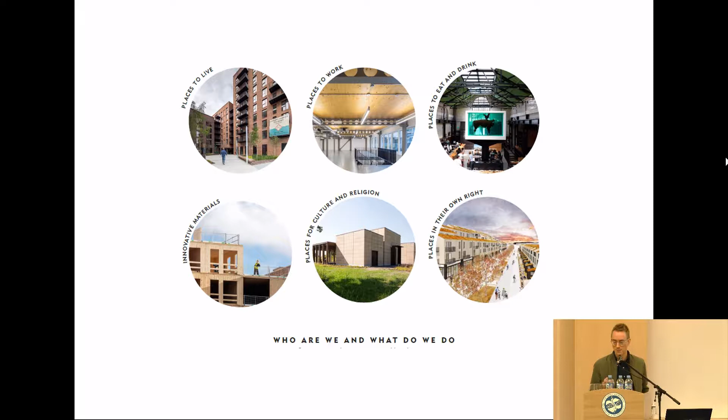We're a studio of about 30 people, founded by directors Andrew Waugh and Anthony Thistleton about 21 years ago, based in central London, but we work across Europe, including projects in France, Sweden, and predominantly the UK. We work across lots of different sectors, so predominantly the residential sector, apartments, private houses, and increasingly a lot of commercial office projects, particularly in London at the moment. We also do other things like Jewish cemeteries, which is a bit different, and we also do master planning projects and things like that, so all sorts of different scale projects. And that kind of gives you an example.

We've done CLT projects on private houses all the way through to student living and larger apartment schemes, so a real diverse mix of projects within our portfolio.

We've worked for lots of different clients, so Vastint, who I know are a large company across Europe, we've done quite a bit of work for. Berkeley Homes and the Office Group, two of the largest development companies for residential and commercial in the UK. So we work with lots of different people, and we really enjoy collaborating with our clients. We always think that design is a process, and that working with clients is the best way to get the projects that we want and they want.

We're also very much involved with academic research and work closely with lots of universities, so we have a good relationship, particularly with Cambridge University and Michael Ramage there, who is heading up their materials department. We do quite a bit of teaching, so my boss Andrew particularly lectures across the world at places like Yale, in Switzerland, and in Scandinavia. He's not here today, you've got me, but it's all about getting the message of CLT out there to everybody.

We're an award-winning practice, so a lot of the work we've done, although it's CLT and timber orientated, design is at the heart of everything we do. CLT to us is a design tool that we use to create our buildings, and a lot of those have been recognised with awards, which has been fantastic.

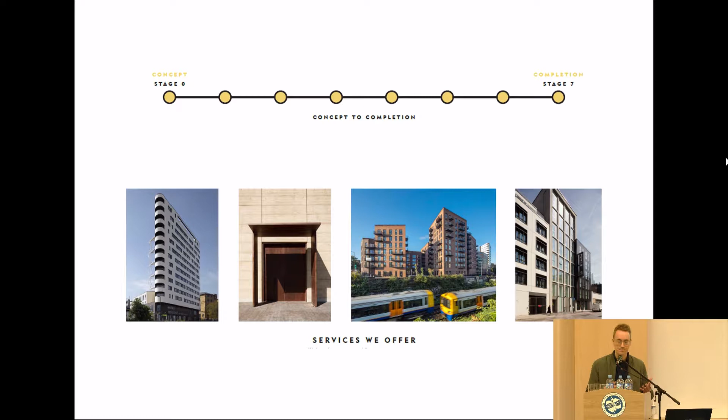As designers, we're very interested in how things are connected and how they go together, and we think the best projects come from that understanding. That's not to say that we don't just work at early stage stuff, so we can do concept design and what we call planning sorts of designs, and often we'll stay client side during procurement to ensure the building is delivered in line with its design intent.

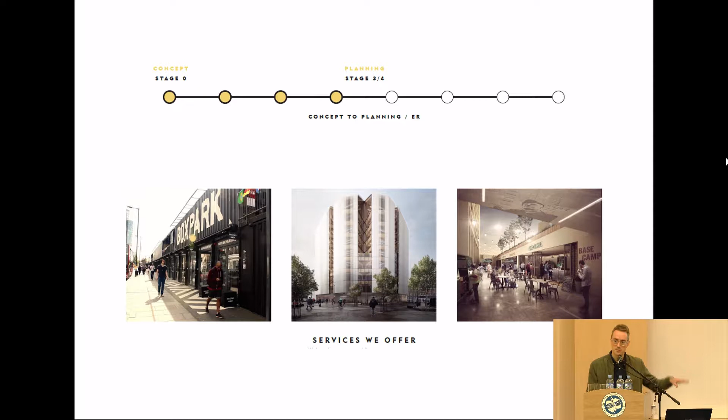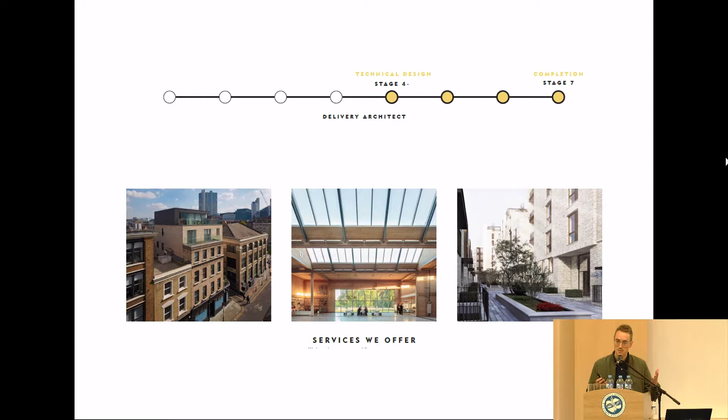So why do we use CLT as a practice? Fundamentally, for Waugh Thistleton, it's about trying to limit our impact on the planet and make a positive contribution to reducing carbon dioxide emissions. The reason we use timber as our main product within our buildings is that it promotes decarbonisation and the forestry economy. By planting more trees, we're absorbing more CO2, and if we can create a market for that activity to occur, then we can promote that reduction in carbon dioxide emissions.

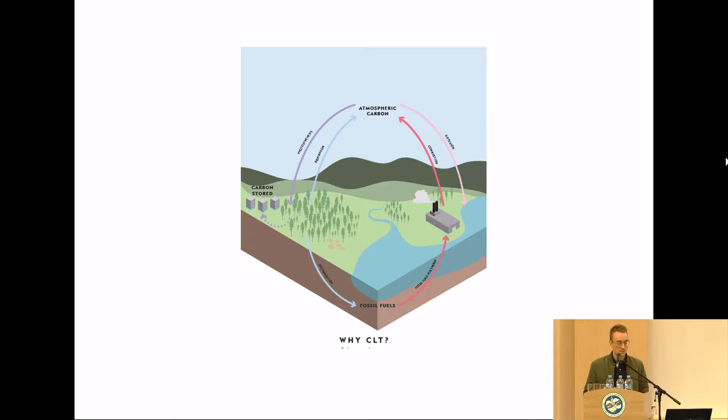Why is that important? Well, if we look at concrete and steel, they're huge contributors to our climate problem. The production of cement and concrete is very energy intensive. There's a lot of steel that goes into our concrete buildings to reinforce them, and these products take a lot of energy to make. And if you consider where the sand comes from and things like that, we are having a large impact on our planet.

So the use of timber for us is to try and move away from these traditional construction materials that were kind of the 20th century materials, and using timber, try and find an architecture for the 21st century.

Also, another good reason to use timber products is that the buildings we're creating these days are very airtight, very well performing. The building regulations and standards necessitate that the energy these buildings use once they're in operation is relatively low. And what's happening now is that because that's becoming so low, the embodied carbon of the buildings we're creating has a much greater impact on the overall carbon profile.

So we're really keen to put the discussion and the argument out there into the industry that embodied carbon is just as important, or more important, than operational carbon. There's obviously room for both, and we have to think of that in a joined up way. But at the moment, a lot of statutory legislation, lots of the measures by which we judge sustainability, is weighted to operational carbon rather than embodied carbon. And we think that should change, and we think timber can obviously help that.

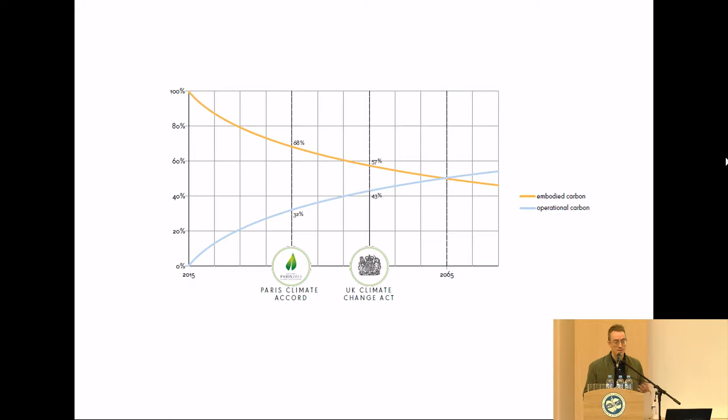And so CLT, just by its nature, is sequestering that carbon within the product, and then that carbon, once it's in a building, is locked away.

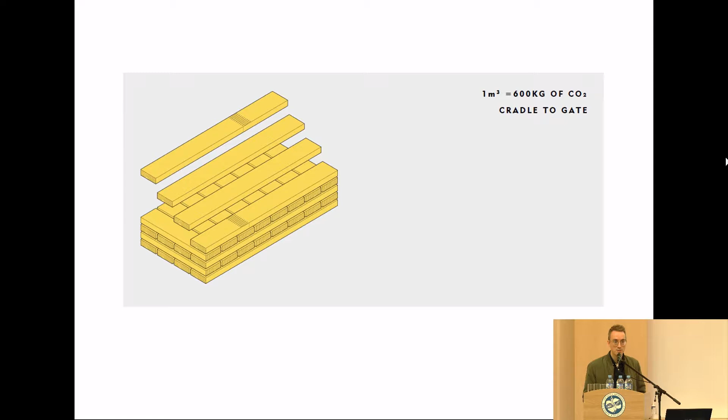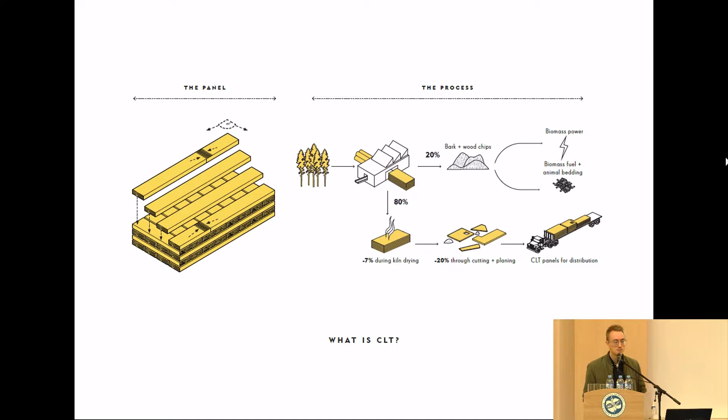It's important to understand that the process of creating engineered wood products is actually a very low waste process. Once those trees are harvested, the timber can be manufactured into various different products. With CLT, it's about small pieces of timber laid perpendicularly to each other to create strong panels. During that process, any waste from the cutting and manufacture gets put back into the manufacturing cycle. So if you've been to one of these plants in Austria, you'll see that the waste wood contributes to the energy that drives the machinery within these factories. It's a real holistic process from forestry all the way through to manufacture.

And if we consider that manufacture as one part of this circular economy, then we can lock away that carbon within the buildings we're creating. And that's the kind of process we're trying to encourage.

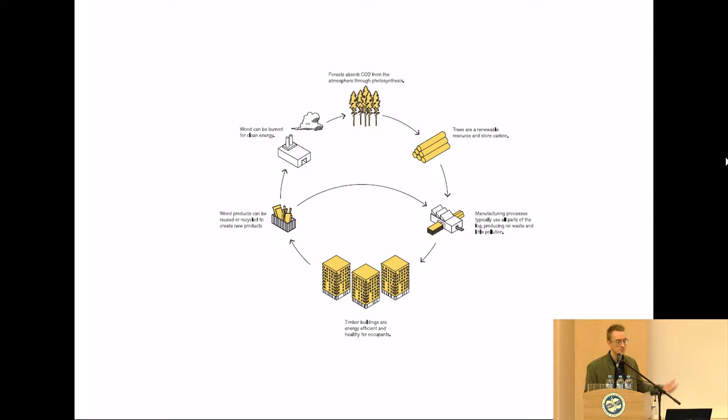And so the Murray Grove project, which we've seen briefly just a minute ago, was the first at-scale realization of our ambition to create a low-carbon building. This, for example, was a 9-story residential building. I think there were 47 apartments in there, and this was completed in 2008. This is regarded as the first timber tower, if you like, and for us, the first proof of concept that CLT can be used to create large-scale buildings that will sit within our urban environment.

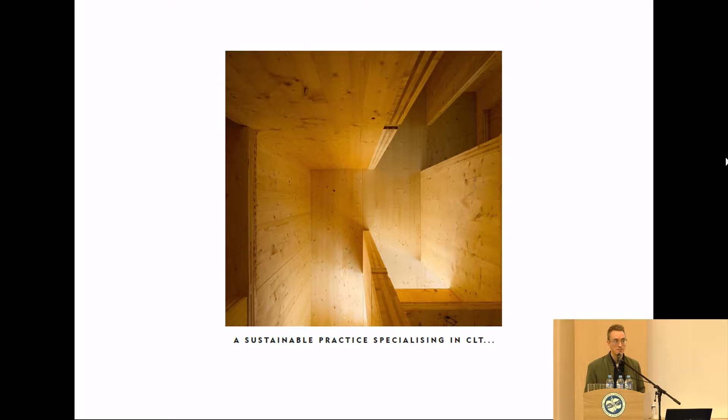Our experience from that really shaped the practice over this last 10 years. We've really become specialists in sustainable architecture. We've become specialists in delivering CLT buildings and using prefabricated products to develop our schemes.

We've also worked recently with Legal & General and Swan Housing. Legal & General in the UK are a particularly large company, finance experts, but are getting into this modular housing market. The context in the UK at the moment is that we have a huge housing crisis—there just aren't enough homes for the nation. Modular, volumetric ways of constructing are seen as one way of addressing this housing crisis. So we've been working with those companies to develop CLT-based volumetric housing products.

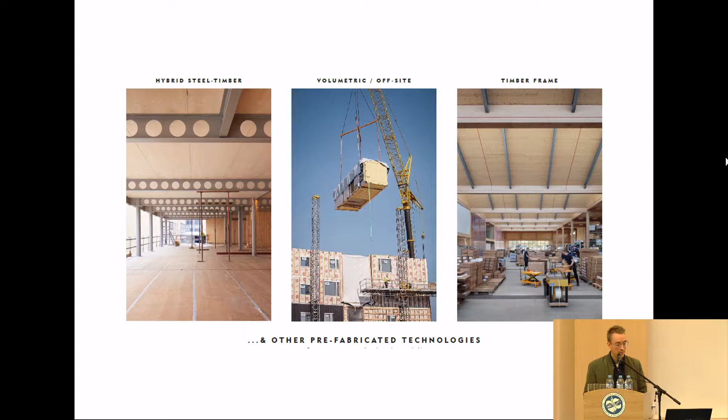And that's certainly a growing market over there, we think.

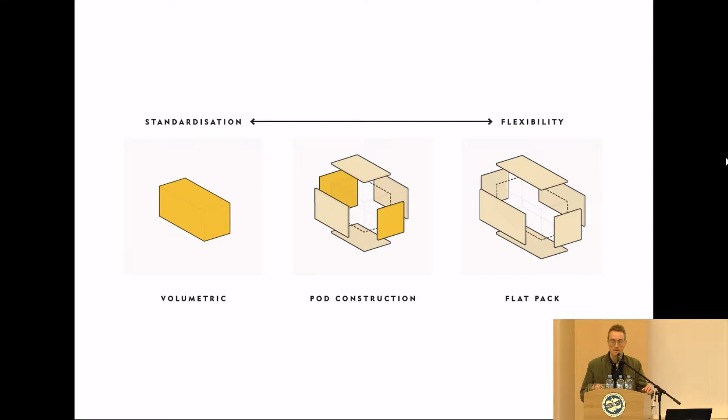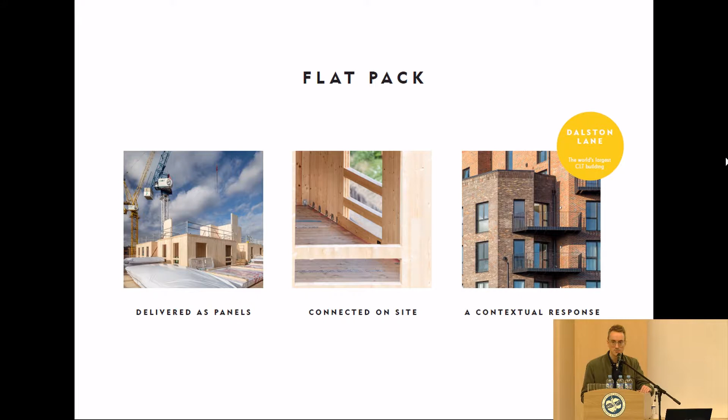As an example of a flat pack, this was our Dalston Lane scheme. There's a good reason why this was flat pack, but the whole scheme was developed with simple panels like that screwed together on site. And that's it when it was completed.

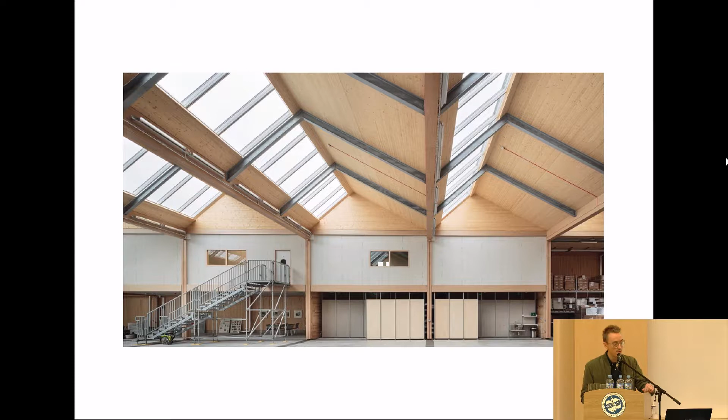This again is the Vitsœ factory, so we can see there are CLT panels forming the underside of the roof and some of the walls at the far end. These are used in conjunction with BauBuche LVL beams and columns, as well as steel, so this is what we'd call a hybrid CLT scheme. But everything here was designed to within plus or minus 2 millimeter tolerances. Vitsœ, being a furniture manufacturer, were very keen that the building was like a piece of furniture, and this is where engineered wood really played to its strengths, because we were able to get really tight manufacturing tolerances even between all these different products.

There's just another view of it there.

This scheme here was a student scheme in Brighton, for 57 studio apartments, a student project. The scheme had to be completed within 10 months, and we used lots of different modern methods of construction, or prefabricated technologies, to complete this. So we had closed timber panels, structural SIP panels, CLT floor slabs, prefabricated bathroom pods, and prefabricated brick cladding. So it was a real juxtaposition of modern methods of construction and a real showcase for what you can do using prefabricated products, including CLT, but not limited just to CLT.

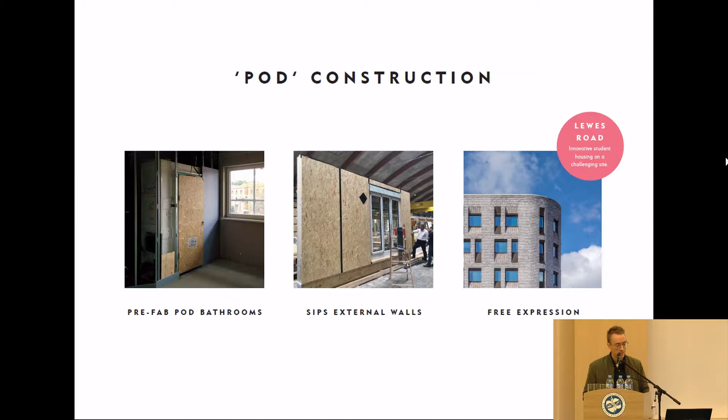So again, lots of low waste products from low waste processes. And that's a complete scheme again there.

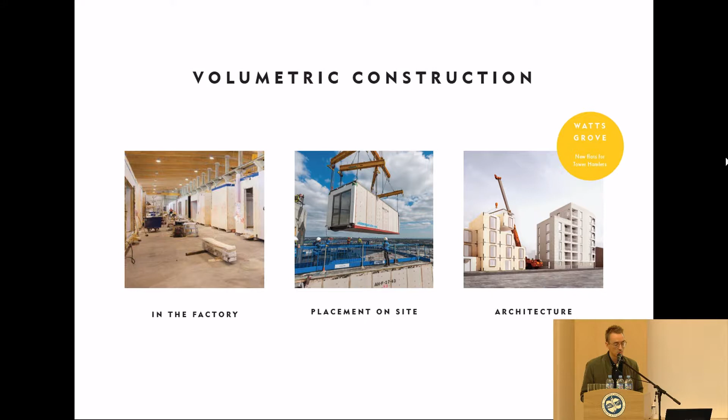As I touched on with the volumetric, we're doing more and more work in the volumetric modular sector, particularly residential, on the basis that we've got this housing crisis. Our first multi-story CLT modular scheme is coming forward, at Watts Grove, a site in central London, which will be a multi-story scheme with lots of different CLT modular types. It's the first project for our client using this technology, but it gives them the flexibility to create all these modules in the factory and then deliver them to site and construct very quickly.

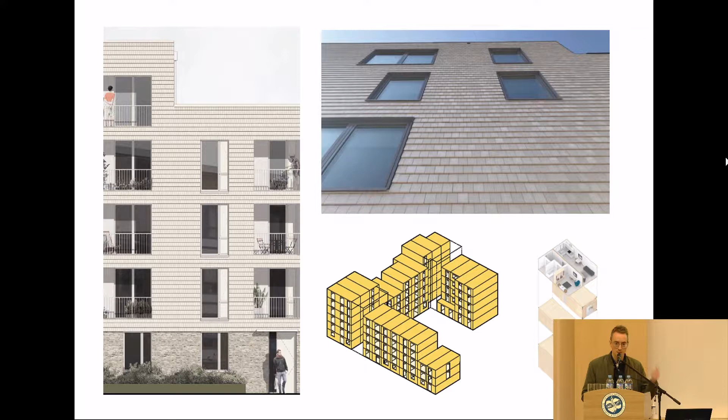So the benefit of this approach is that once you get on site, the build program is vastly shortened. All that work is completed to create the modules in the factory, so you've got your bathrooms, kitchens, and finishes all completed in the factory. So it's on site at the moment, but this is what it'll look like when it's completed, all being well.

Off the back of that process, we took our education from it to create a modular design guide so that other architects and engineers going forward could better understand how to design with the CLT modular system. So it's a really important project for the client and for our office, and really demonstrates what you can do with CLT in a modular volumetric context.

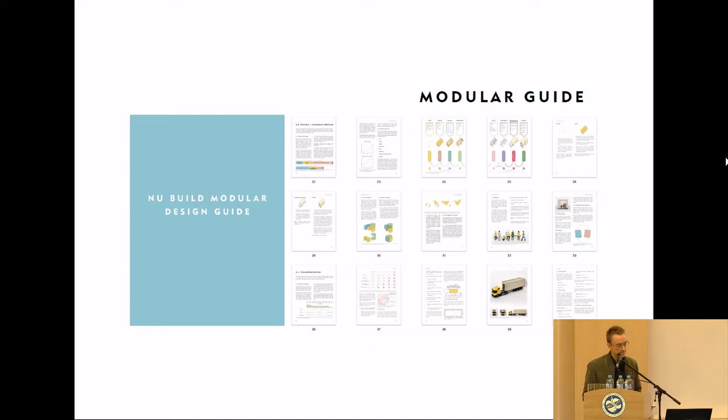And if you really want to push it, this was a project we completed this year for the London Design Festival. This project was called Multiply. It was a series of tulip wood CLT panels that were bolted together to create smaller CLT modules that were then transported to site. So this is a combination of flat pack and volumetric modular, and really demonstrates that timber can be used in so many different ways to configure different types of architecture. There's no one size fits all, and even though we always want to try and use timber, there's lots of versatility with that when you do so.

And so far now we've completed over 20 CLT buildings, and we've got more on site at the moment, so we've become real specialists in this area.

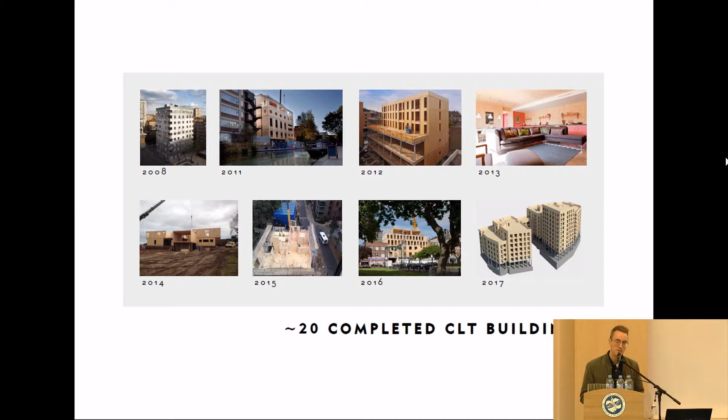Just to look at a bit more detail at the Dalston Lane project. This was a project I worked on for 3.5 years as a project architect. It's a scheme for 121 apartments and 3,500 square meters of commercial office space. It's the tallest CLT building in the UK and one of the tallest in the world. It's 10 stories at its highest. We've got about 8,500 square meters worth of residential floor area. The building incorporates 7 separate cores which serve the residential apartments, and then the commercial space links those together, as we'll see in a second.

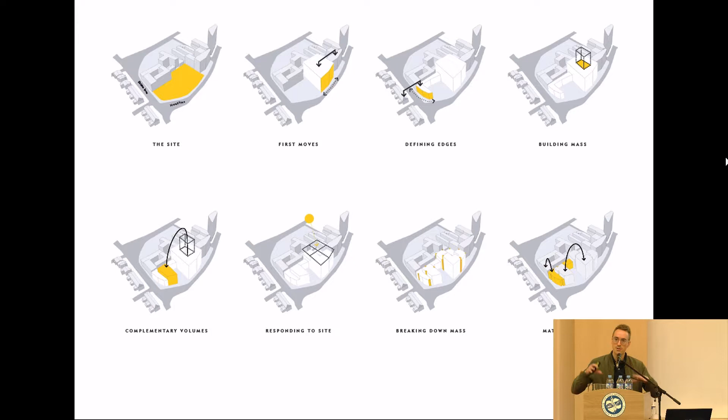The building's located on a former industrial site within East London. One of the main constraints is that the scheme is surrounded on 2 sides by roads, and at the rear of the site we've got existing buildings. Those buildings vary in scale, and the context varies between domestic and urban scale. So the arrangement of the building is very specific to its site in terms of its plan layout and massing. The massing was developed to respond to its surrounding area and to maximize daylight into the apartments. So the building's characterized by having several different volumes at different heights.

That's just a view from above, so you can see to the south there's some existing buildings, and also to the west there are some existing buildings and those roads around the side.

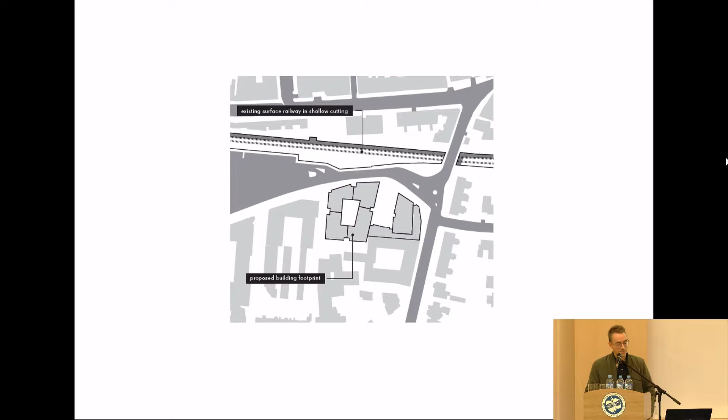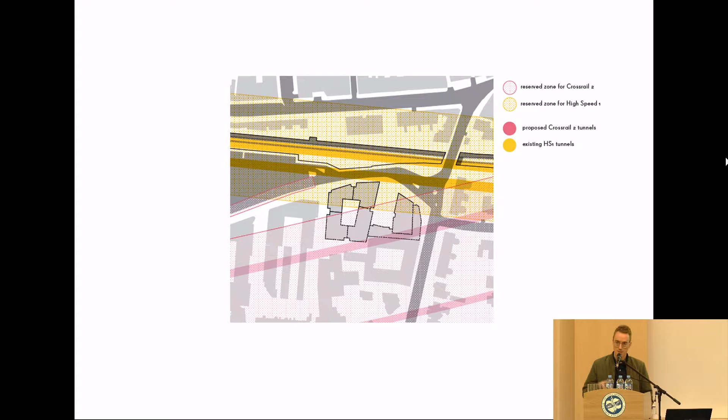The other main constraint for this project, and the key constraint that led it to become a CLT project, is that the scheme is located directly above the future site of Crossrail 2. Crossrail 2 is a high-speed rail link that's going to be created between North and South London. And because the location of that is mapped out, there were certain rules as to what you can and can't do above that route.

So at Dalston Lane, due to that railway line, we weren't allowed to build using concrete piles, because they would have interfered with the train line below. This necessitated that whatever we did would have to use a thick raft concrete slab foundation in order to distribute the load away from that future rail line.

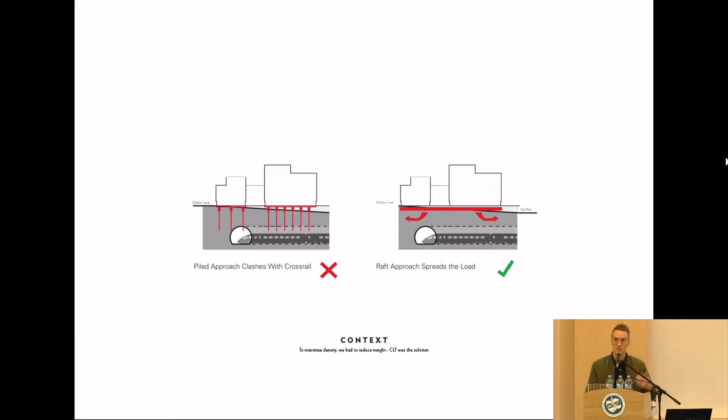Now in concrete, that is doable, but you would end up with a shorter building simply because concrete is a much heavier material. So the reason we went with CLT on this was that CLT was the only way this site became viable and financially affordable for the client, because we were able to offer a greater density and a greater height, which made this a much more cost-effective project for the client.

So in understanding that we would need to deliver a lightweight building, as a design for us, when we start out doing CLT buildings, we consider what the constraints of a typical manufactured panel are. We look at the different ways in which you can apply CLT, so we have to decide whether it's suitable for load bearing or whether we're going to need larger spans that might necessitate a hybrid solution. At Dalston, with the majority of the floor plate being taken up by residential apartments, we knew we were going to have to do a load-bearing solution.

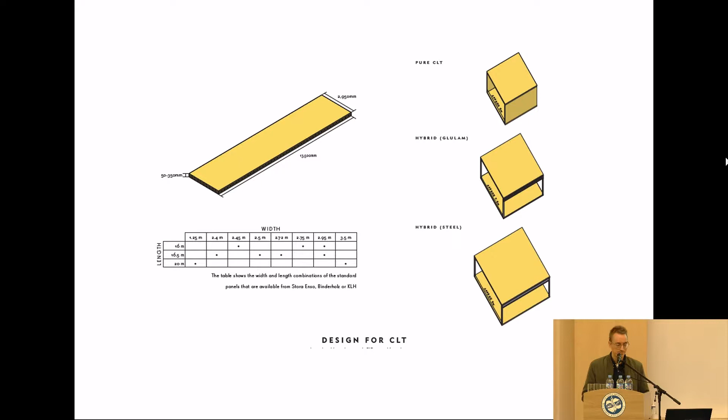The stair cores, the lift shafts, the stairs, they're all also solid CLT panels. And where we have the office link space to the south, again we have CLT panels, but these are much deeper to get over the larger spans.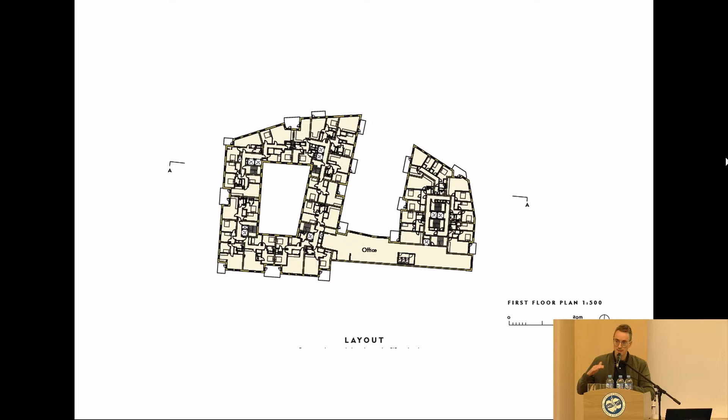In section, at basement and ground level, we have the concrete basement and raft foundation, above which we have a traditional concrete frame, which terminates in a first floor transfer deck. At first floor we've got a big, thick, 500 millimeter concrete slab onto which all our CLT is constructed.

So we have a mix of heights across the building, which gives you a sense of the variation in the massing. At its tallest, in the middle section, that's our 10-story section, about 34 to 35 meters above ground level.

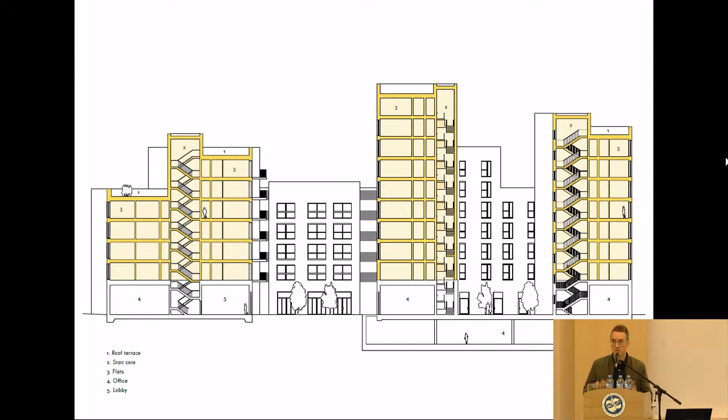We can also see the CLT's cellular nature, both in plan and in section. Another thing to point out is that the CLT at the lower levels is a lot thicker than the CLT at the upper levels. So as you go up the building, we're increasing the available net or sellable area, as the client calls it, meaning the apartments get bigger nearer the top. We're increasing the floor space by reducing the timber as we go up.

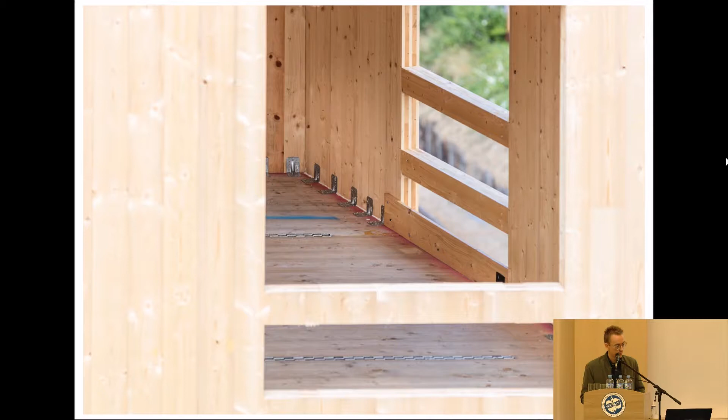That gives you a better sense of it in 3D there. So, just a quick snapshot into one of the flats.

You can see we've got timber panels that are fixed down using just steel brackets, a very simple approach. Those panels come to site, are craned into position, and then screw fixed down. It's very quick, very quiet. All the locations for these brackets, all the holes, all the openings, are designed at the beginning and coordinated in CAD, which makes it very simple on site. There's no building work, effectively - you can just bolt it all together like Meccano.

With Dalston being a particularly tall building, there were some difficult fire regulations to get round. In the UK, if a building is over 18 meters in height, we have to design it for 90 minutes fire resistance, which is what we have at Dalston. The stair cores will have to provide 120 minutes fire resistance to allow for escape.

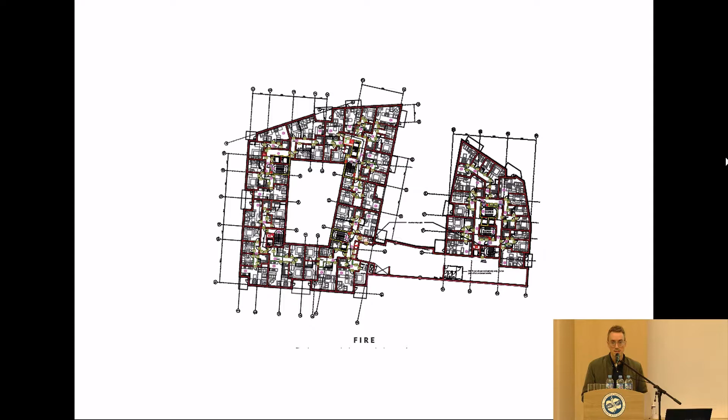What you'll typically find in most multi-story CLT buildings is that the CLT is designed to allow some degree of charring during a fire, and that timescale is taken into account when you come up with the overall fire resistance. At Dalston, the outer layers are designed to burn during a fire without compromising the structure, and the CLT is also supplemented with plasterboard to increase that fire resistance to the 90 minutes and 120 minutes required.

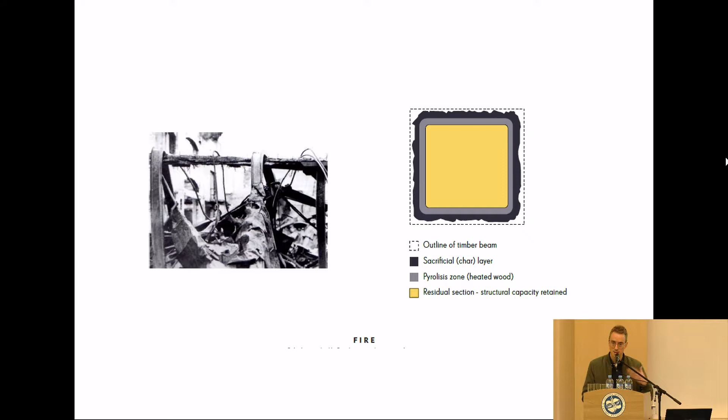As well as the fire considerations, we also had some typical performance requirements. At the time we were aiming for BREEAM Excellent Standard and what's called Code for Sustainable Homes Level 4. Interestingly, both those standards, although they prioritize sustainability, mainly focus on operational in-use energy use, and relate more to how the building relates to its social context.

So, does it have bikes? Does it generate its own renewable energy? That sort of thing. So even though there were quite stringent sustainability criteria for us to respond to, the CLT didn't contribute to meeting those targets by virtue of the carbon it was sequestering. Even though we're using a sustainable product that contains carbon, these sustainability standards in the UK don't give you any points for that, which I've never really understood, but that's how it works.

We also have quite high performing building fabric in terms of its U values, and the air tightness is also quite high - we were aiming to achieve twice the amount you would usually require under the building regulations.

Also, in terms of the acoustics, we had to bring about a 5 decibel increase in performance over the building regulations in order to get those BREEAM and Code for Sustainable Homes standards.

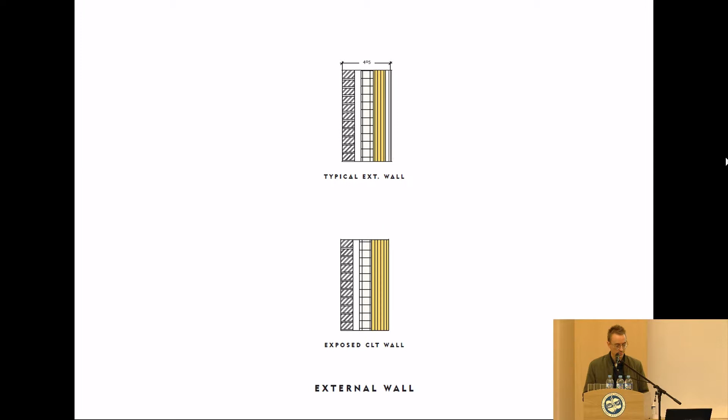In terms of party floors, we had very thin floor build-ups overall. If this scheme had been built in concrete, we would have had much thicker floor slabs and a taller building, which was one of the reasons it wouldn't have been viable to build this in concrete.

To get the 5 decibel improvement over the building regulations, we had a floor build-up that included an acoustic isolation layer and then a screed on top. That screed also contributes to giving extra mass to the building.

One of the challenges for the engineers during the design stage was that a building of this height, being lightweight, would want to move in the wind. So we had to provide lateral resistance by increasing the weight of the building, and the screed contributes to increasing that mass and helps make the building sit down on its site.

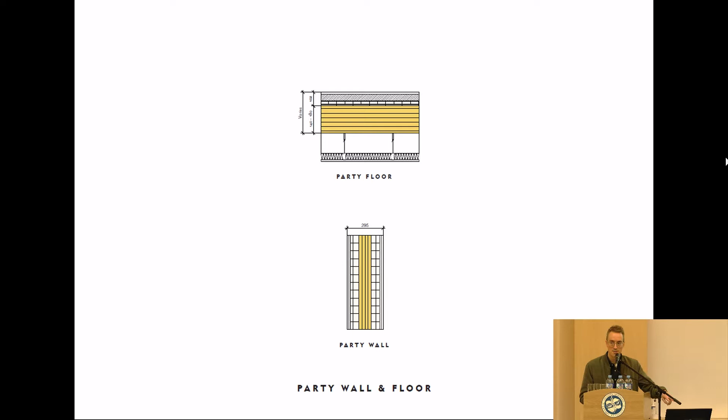For the party wall, again we've got the two layers of plasterboard that improve the fire resistance, and then the air gap is insulated in between to provide an increase in the acoustic performance. But again, you get a very thin wall compared to a blockwork or concrete frame type system.

For the roof, we've got flat roofs here, or roofs with a very shallow fall on them. Again, nothing particularly different to what you would do in a standard approach.

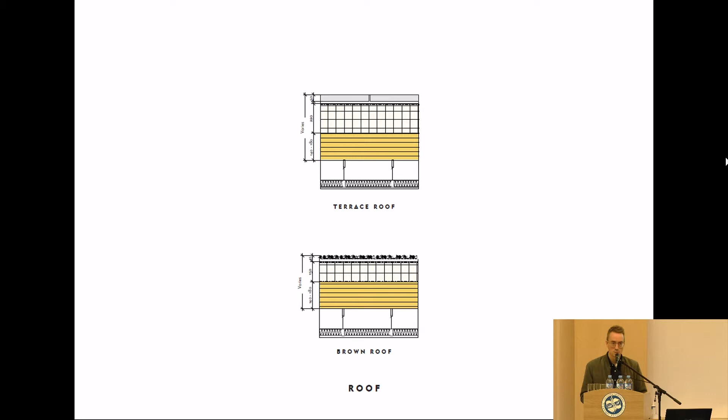I think it's important to understand that when you use CLT, you don't need to use different special products. You can use conventional building products that you would use on traditional schemes to supplement the CLT. So just because you use an innovative material doesn't mean you have to go and spend lots of money on new, innovative finishing products.

Just a note on procurement: this is one of the first times in the UK that the scheme was designed using the data from the 3 big suppliers, in this case Binderholz, KLH and Stora Enso. Our engineers designed it in a way that would allow for a competitive tender in order to improve the value to the client.

It just meant at the design stage we had to allow for the thickest possible panels, and then post-tender we were able to identify efficiencies in line with the supplier's panels and work more closely with the supplier to try and reduce the amount of volume of timber where possible.

In contrast to the Murray Grove project I showed earlier, this scheme uses a lot less timber, way more efficiently, and that's just on the basis that 5-6 years later, since we did Murray Grove, we've learned a lot more. Engineers know a lot more about the product, and those safety factors are now better understood, so we're able to use timber more efficiently, which makes it more cost effective.

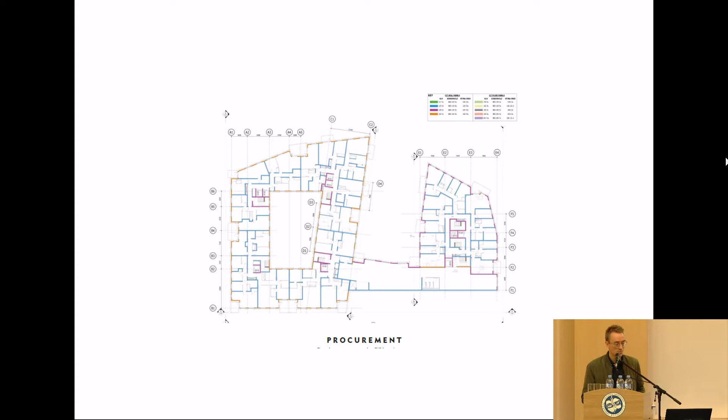One of the other constraints on the Dalston Lane scheme was movement. With it being a 10-story scheme, it's quite tall, so the action of the CLT and the loads transferring down the structure would mean that at the floor edges, where you have timber coming in horizontally, you get a force on that timber which would cause the building to creep and move. So from an early stage, the engineers decided that we would have to introduce grout pockets.

These are prefabricated holes in the edge of the floor panel that were infilled with a cementitious grout. What this allows us to do is transfer the wall loads straight through the floor to the wall below, which means the building is much more rigid and it avoids any movement or any eccentric movement.

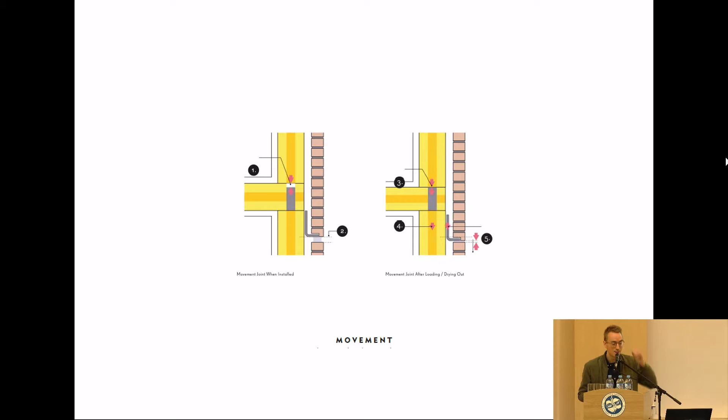Also to take into consideration, which this diagram on the right-hand side shows, is that the brickwork is supported from a masonry support angle that is set just below the floor slab. The reason for that is in CLT buildings, and particularly high-rise CLT buildings, the movement is always at that floor edge, because walls are very rigid and much taller, you get very little movement over the full wall panel. So what you want to do when building with load-bearing brick is locate the masonry support away from that floor slab edge and away from that junction to ensure it's not affected by any movement.

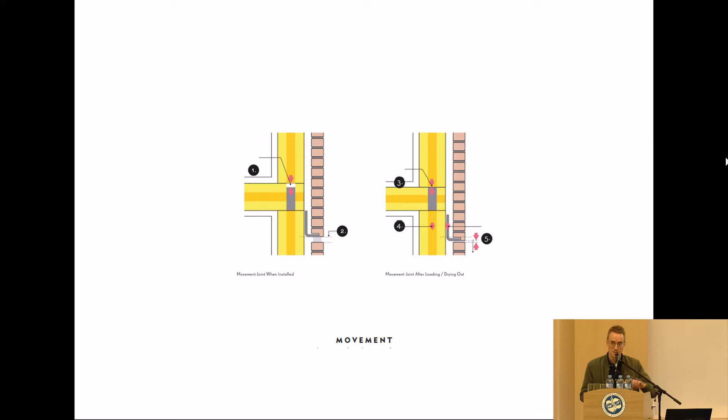This detail explores that in a little more depth. The masonry support angles were set to pick up all the heads of the windows and door openings in the facade, so we have a masonry support angle on every floor that picks up the brickwork. Now, we didn't need to do that - the brickwork could have been supported every 2 floors, but we felt rather than using separate lintels, this was a better, more efficient approach.

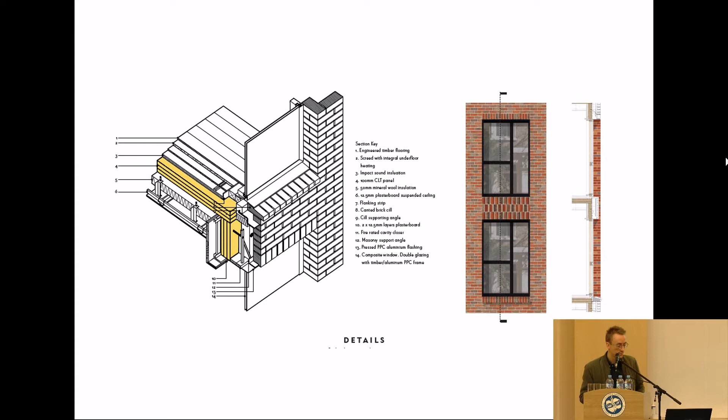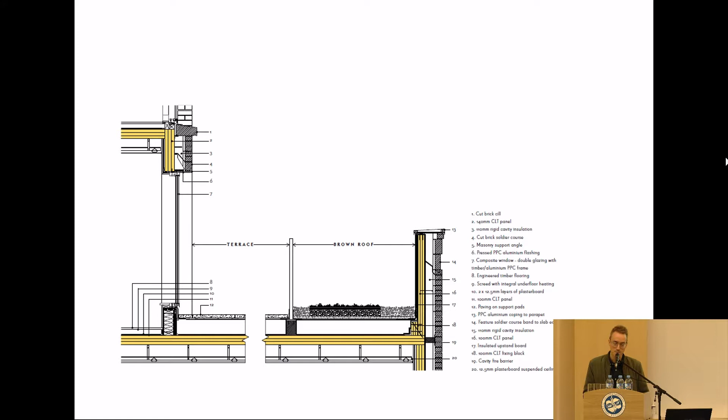Just another detail here showing the roof level parapet. At Dalston, what we did was continue the walls up and past the floor edge, and they created our 1.4 meter high parapets. We had to strengthen those with a small piece of CLT in the bottom right corner - that's just because there was an eccentric load on that parapet edge, but it was preferable to do that rather than using a glass balustrade or a metal balustrade.

Balconies - at Dalston all the balconies are prefabricated off-site and then bolted onto the scheme, onto the CLT during construction. At the design stage we worked with Binderholz and BK Structures to develop the bracket connection for each of the balconies across the entire scheme. We have about 7 different balcony connector types, and we had to ensure and coordinate the location of all those prior to CLT manufacture.

So all the holes for those balcony connectors were pre-cut in the factory in Austria. That allowed the contractor to put the brackets in during the CLT build, and then the balcony supplier to crane those balconies into position and bolt them on. Again, it was all about trying to use prefabricated components where we could to increase the speed of the build.

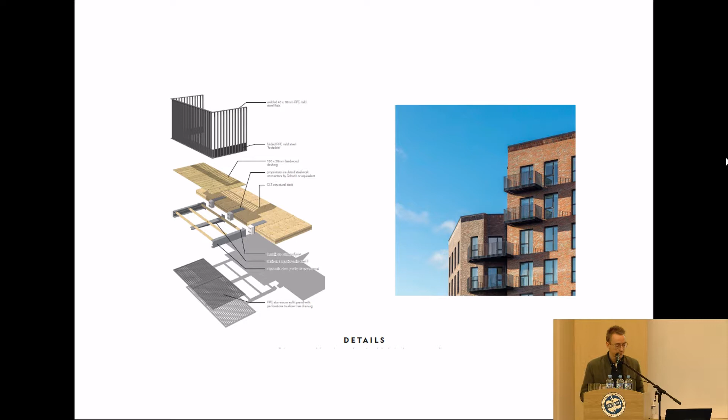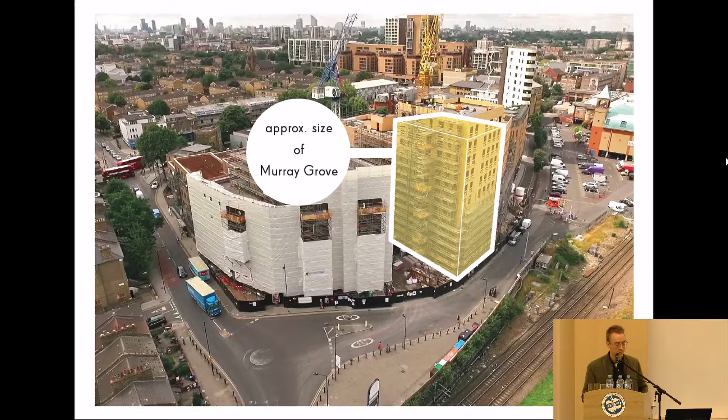Overall, we were able to provide more homes because of the lightweight nature of the timber. We actually managed to provide capacity for 35 additional homes, 20 of which were built during this build, and 15 of which the client is hoping to get consent for at some stage in the future. The structural design allows for an additional story to be put on top, so this was the key driver to making this site viable, and this is one of the reasons why, particularly in an urban context like London where you have lots of constraints, a lightweight solution makes a lot more sense versus a traditional build. So, yeah, the CLT was fundamental to the success of this project.

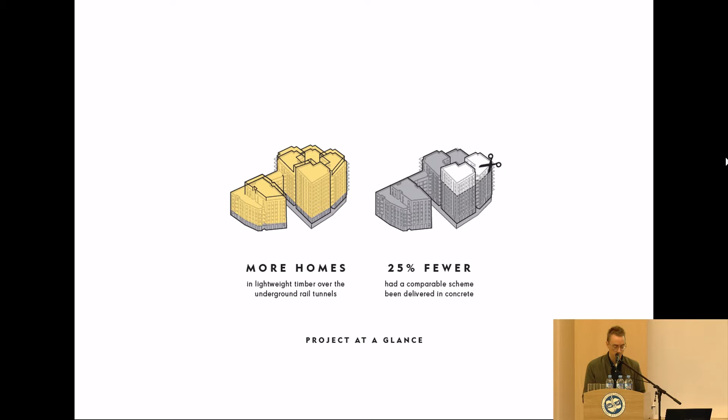Another comparison - the timber for the frame was delivered in exactly 111 lorry loads from Austria. What's great about CLT is you can design it all in 3D, test that it goes together and is coordinated, and then work out the logistics of that and figure out how many loads you're going to need delivered to site. This gave the contractor real confidence that they knew when the timber was going to arrive, and that their program would be accurate.

It wasn't affected by the weather. There's no curing period for CLT, unlike concrete. There's no big heavy mixers on the road. It's a much easier, quieter way of doing things.

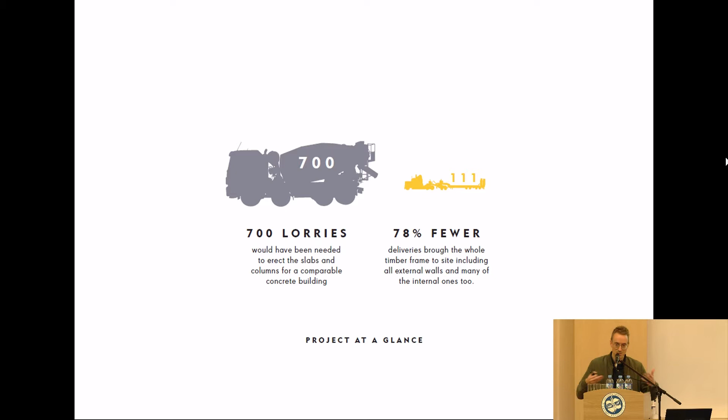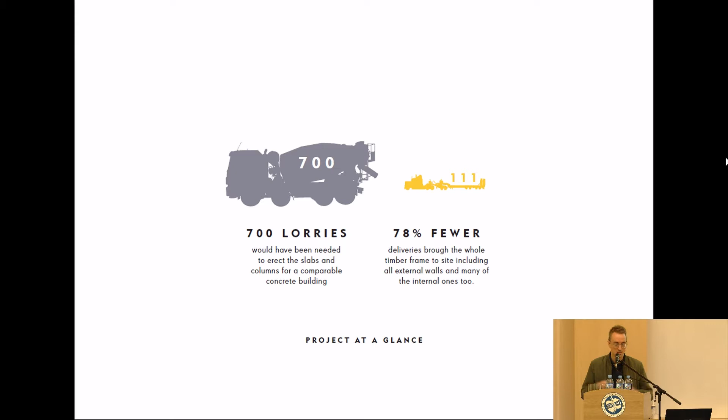This comparison is just a frame comparison. What this doesn't take into account is that if you're building with a concrete frame, you have to come back and put something else in between the concrete columns to complete the structure. With CLT, you're getting the walls and the structure. With concrete, you get the frame, and then you end up putting a steel or masonry structure in between those columns. So all of that has a time attached to it.

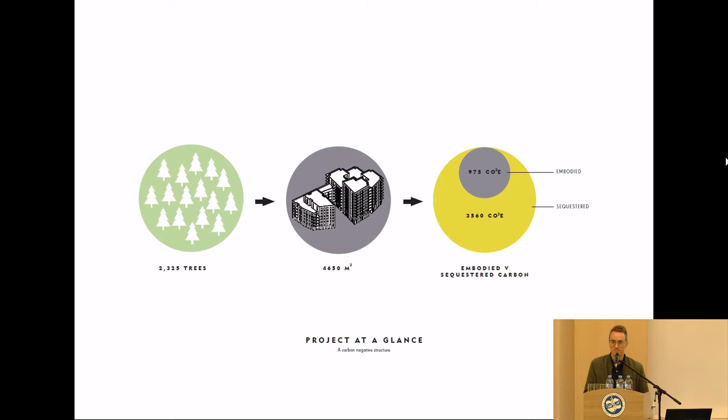Our engineers inform us that we used about 2,500 trees to create the CLT for this building, and that there were 4,500 cubic meters worth of timber. So the sequestered carbon within that CLT frame is equivalent to about 3,500 tons, and there was less than 1,000 tons used to produce it. So it's a carbon negative structure. That just kind of sums up why that's one of the fundamental reasons we're trying to use this product.

In the end, we met our sustainability targets quite comfortably. We overperformed on air tightness without even trying, by virtue of the fact that timber is so precisely engineered. It comes together so tightly that you get a very good inherent air tightness, far above what we were expecting.

Also, when we had the building acoustically tested, we found that we'd gone 8 decibels above the requirement, a lot more than we'd anticipated. I think this is because there's not enough evidence of sound testing of CLT buildings at the moment. That is improving, but I think people underestimate how good it can be at creating really good acoustic barriers, which is why companies like Moxy are using it for hotels.

Just a final piece here. Waugh Thistleton were commissioned by the Softwood Lumber Board to produce a study based on 100 UK CLT buildings that have been completed. The reason for this was that in North America, particularly Canada, they have a huge timber resource they're not really using at the moment. America is known for its stick frame, lightweight timber frame construction approach, and the softwood board felt there was a whole new market they could get into using CLT.

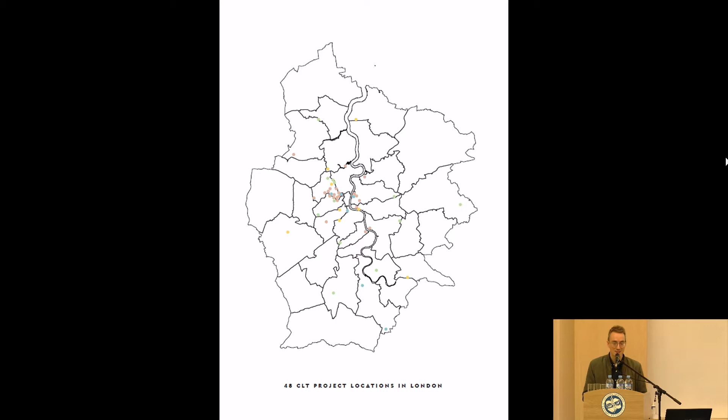Also in London, this kind of expediency to build and develop things quickly is really important for clients. They want to turn around their buildings very quickly, so CLT can help deliver a much quicker build program and get buildings on site a lot faster. That's why I think we see a lot of buildings in London. Plus London tends to be a leader for a lot of things, and a lot of the architectural talent is located there, so there's more of a willingness to innovate, I think.

So yeah, it's quite a lengthy book which you can download for free. It includes lots of case studies which really varied in their kind of sectors and typology.

So for example, this is a school project completed by Sarah Wigglesworth Architects. Schools particularly have been using CLT for quite a while. The key reason is that the academic year tends to start in September and finishes in June. So if you need a new building for your new academic year, you want the certainty that it's going to be completed in time. So we see CLT used a lot in schools because it gives that program certainty.

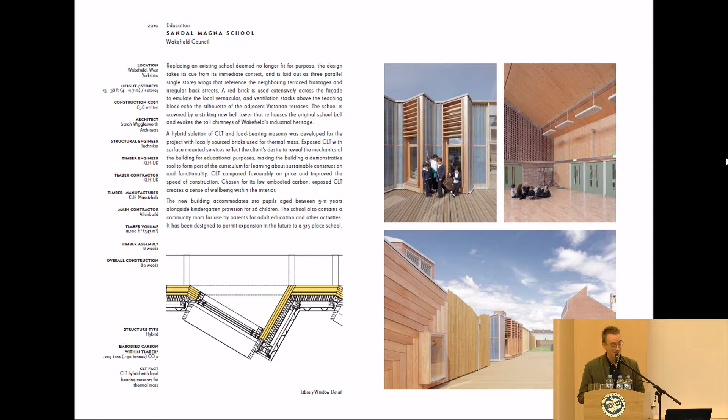We also see it used a lot because the timber can be used in an exposed finish. And I believe it's been proven in studies that, particularly in school environments where you have exposed natural finishes within the building, students' heart rates drop and it's a better place to work and a better place to be in. So yeah, that's certainly one of the drivers behind why schools are using CLT.

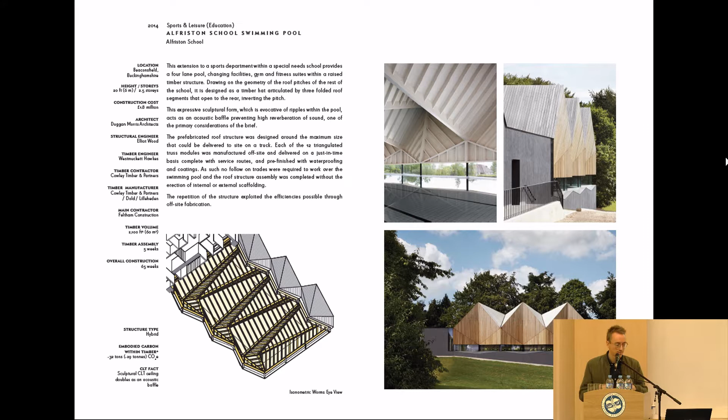This scheme here was a scheme by Duggan Morris for a swimming pool. It was also actually at a school, but one of the reasons they used CLT on this scheme was that the geometry for the roof was particularly complex. Now the great advantage of CLT is that when you manufacture it, it can be cut to really complex geometries and really tight tolerances. So if you want to achieve a form like this, which is almost like origami, the certainty of bringing those panels together and knowing that they join perfectly is massively beneficial. So that was one of the drivers for CLT here.

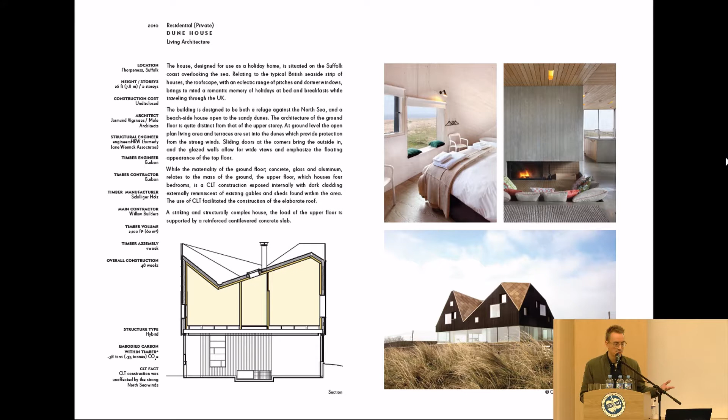We've seen it used in private houses as well. Several of the case studies were private houses where you've got a bit more scope for experimentation with the product. Again, this kind of combines the complex geometries with the exposed finishes, and they were drivers in this instance for CLT use here.

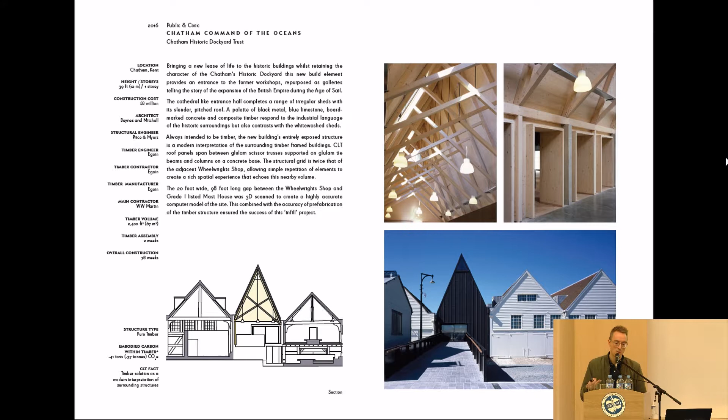And then another scheme there, which was a Stirling Prize nominated scheme last year. Again, there's quite a lot of complexity, but the CLT has been used to create different forms and is used in an exposed way to create the internal finishes as well. So as clients, I think as more people begin to understand what CLT can do and how you can use it, you realize that by building in CLT, you can forego a lot of other kind of secondary products to create what you're wanting to build.

And then the book, this is just an example slide from the book, but the book takes all those 100 case studies and draws down conclusions and analysis about each of those case studies in order to inform readers about the reasons behind why they're using CLT. So if you do pick up the book, there's lots of kind of statistics and things in there.

And as a result of this kind of, both our own work over the last 10 years and this kind of case study exercise, I think we're able to say with confidence some of the things that CLT brings as a benefit.

So speed is always one of the key reasons CLT is used. Because you can prefabricate all the panels off-site, it allows you to shorten the construction program once you're on site. Most CLT buildings will always require some degree of concrete in the ground, so whether you're digging a hole or placing foundations, there is a degree of concrete that's going to be required. But after you get to kind of 150 millimeters above the ground level, it can all be CLT. And once it gets to site, on big schemes like Dalston, you're building roughly a floor every week and a half. So it's very, very fast.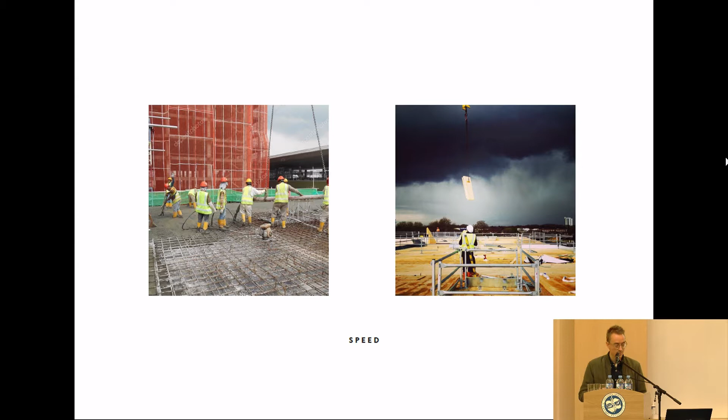And you need a limited team to create this as well. You need maybe 4 or 5 people on site for a large scheme. So it's just a nice way of doing things, very quick, very efficient.

Murray Grove, I think, was constructed in 48 weeks. The original build program, based on a concrete scheme, was 72 weeks. So we shortened the program using CLT by over a third on Murray Grove.

At Dalston Lane, we estimate the program was shortened by about 20%. We also know the timber was constructed in exactly 374 days, which worked out to about one floor per core every week and a half, I think.

So really, really fast. And of course, that timber is giving you the structure and the infill. So I think a concrete frame is kind of as quick in terms of its structure to get constructed, but then you don't have any requirement to come back and infill.

Precision - so I mentioned precision a little bit. All the openings on CLT buildings can be prefabricated in the factory. As designers, what's exciting is you can develop something in CAD, and then that CAD goes to the factory, and then it's all CNC cut to high levels of tolerance, and what you design is what gets built.

So a lot of responsibility, but it gives the designer a lot of control over what they're delivering. And in terms of precision, it really is that precise. You see these panels come to site, and they all just slot into place. The timber itself has a moisture content of about 12% plus or minus 2%, so there isn't a lot of movement in the panels themselves, and that's why you get these very tight tolerances. Very, very precise, allows you to do complex geometries.

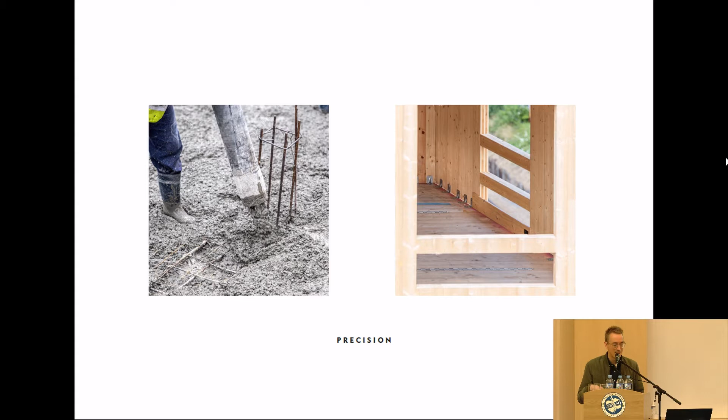Secondary structure - again, one of the good benefits of CLT is that there isn't a requirement for another trade to come in and complete the structural design or complete the envelope for the building. You're getting a lot of bang for your buck with the CLT because it's giving you everything straight away.

The other advantage of CLT, particularly with regards to precision, is that as a contractor you're able to, with confidence, go and procure the other elements of the building. So we know these windows are going to be cut to within 2 millimeter tolerances. That means the contractor can go and order all the windows in advance. They don't need to come to site with a measure and check them before they order them. So it really aids procurement.

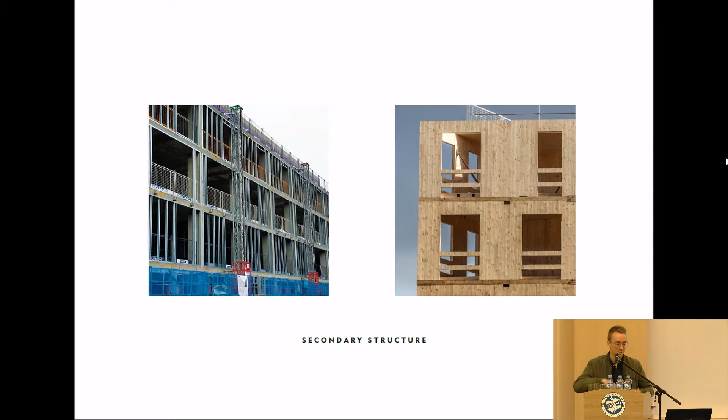That accuracy and that precision also drives better fabric performance. So as we saw with Dalston, we bettered the air tightness twice over without particularly introducing any specific measures to do so.

By virtue of bringing together components that are highly and tightly manufactured, we're not having to rely on third parties to complete the design. What tends to happen a lot in the UK, probably the world over, is that on a Friday afternoon, if the builder wants to go to the pub, they're not really that interested in doing a fantastic job - they'll just leave it. With CLT, there's no chance to get it wrong. It does just have to fit in like a jigsaw. And so that's what drives really good fabric performance.

One of the other key advantages of CLT is that it has a very good resistance to cold. We all know timber is a warm material. Unlike steel, which transfers cold and heat very quickly, timber is a much more stable sort of product. If steel gets very hot and very cold very quickly, timber just levels gently like that. So that natural characteristic of the timber improves the thermal profile and the thermal performance of the building.

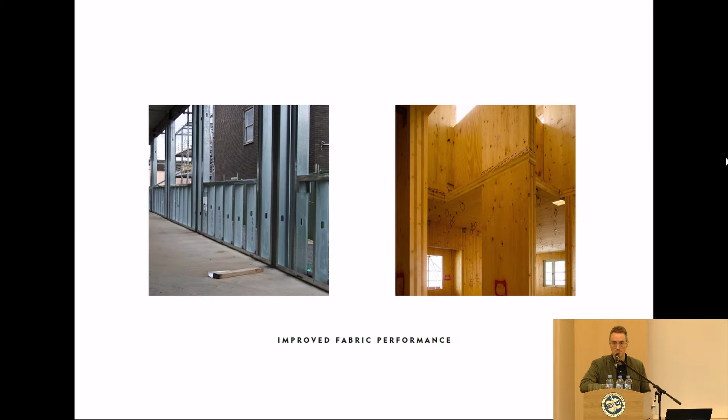That helps us to reduce insulation, so there's a cost saving on the insulation there. It also helps us reduce the need for other secondary products to improve the building fabric. So that's again another one of the large advantages, both in terms of air tightness and thermal performance.

And follow-on trades - if you are an electrician or a plumber, fixing to CLT is very, very easy. It's just like any wood product, you can get a drill and screw to it. It's very quiet, it's very quick. There's no nasty concrete dust, it's not loud to fix to, and it's just a very clean, dry environment in which to work. So we always hear from subcontractors, they're really surprised how easy it is to work with. But yeah, it is a really nice environment to be in.

Also with CLT, we've got less requirement for trades on site. So in terms of site logistics, you don't need as many tradesmen on there.

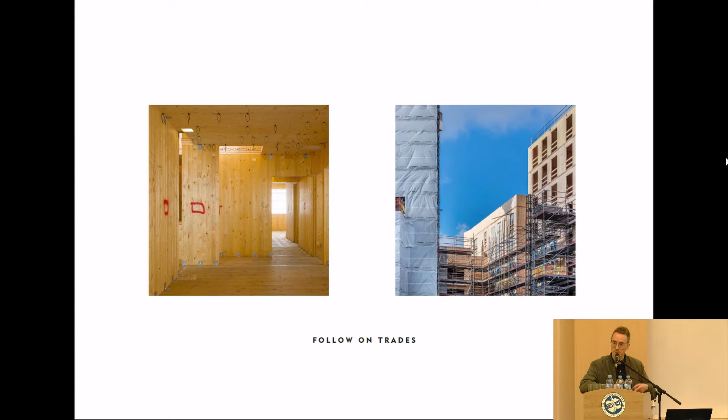As we've seen, you don't necessarily need lots of temporary protection. You can work inside at the same time as working outside. This slide on the right from Dalston Lane shows the scaffold for the brickwork getting constructed, while inside they're doing the first fix, electrics and plumbing. That helps speed up the program by reducing trades on site, and it's inevitably a lot safer.

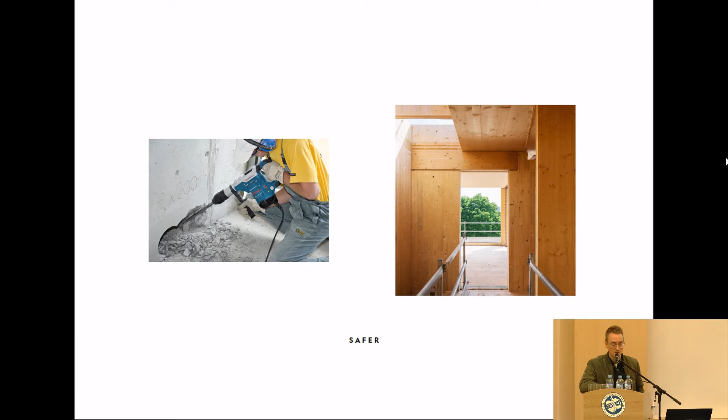If you're putting together a jigsaw, it's pretty safe. If you're having to create that jigsaw out of wet materials and combine lots of small elements together, it's a lot more difficult and there's a lot more risk involved. CLT sites, both on-site and in the factory environment, are just a lot safer, quieter, and easier to work with.

Just a final note - as a practice, we're obviously interested in developing schemes from concept to completion, but our position in the marketplace and our expertise with the material has led us to set up a specific consultancy firm. We're hoping to work more closely in new markets with people that haven't used the material before, to pass on our knowledge and work on projects considering how they might be delivered using timber. Over the last few years, we've taken a lot of traditionally designed schemes and developed and delivered them using timber.

I think our WTX brand is what we want to take forward internationally, so that we can try and see CLT in the marketplace a lot more often. This construction revolution that we're trying to bring about in the UK, we really want to push across the world and internationally. So if you are interested in working with us or asking us to look at one of your projects, do get in touch with us.